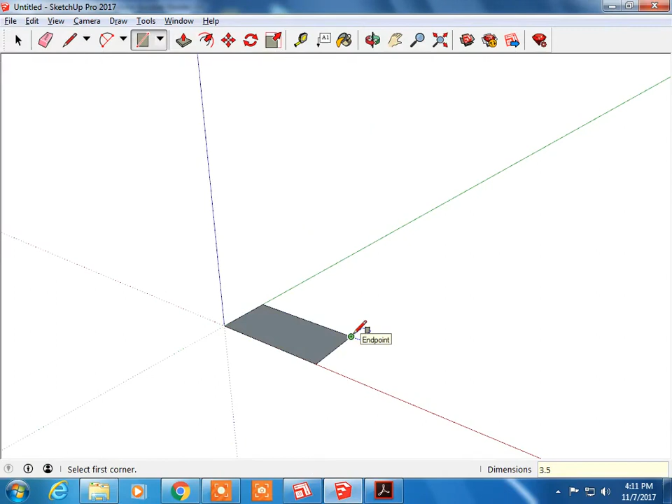So getting back to the modeler, I'm going to select this, pick up my rectangle tool, and describe a rectangle that's 3.5 inches long by 2 inches wide.

So you see it's pretty small, I'm going to zoom in on it. I'm going to check the height of the object. The height here is 3 halves, which is 1.5 inches. So I'm going to take push-pull, and pull this up 1.5.

Now, getting back there, there's a few more details I need to do. I need to cut this U-shaped channel out, and I'm going to subtract it away. So we've got 3/4 inch flat on this side, a 1/2 inch flat on that side, and it's 3/4 of an inch in depth. So back to the modeler.

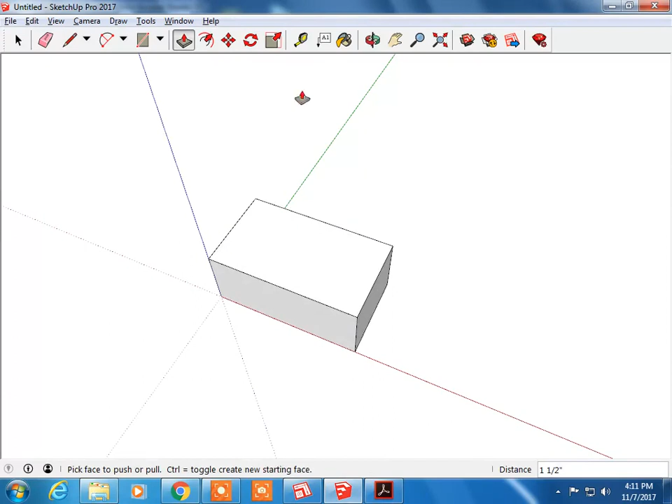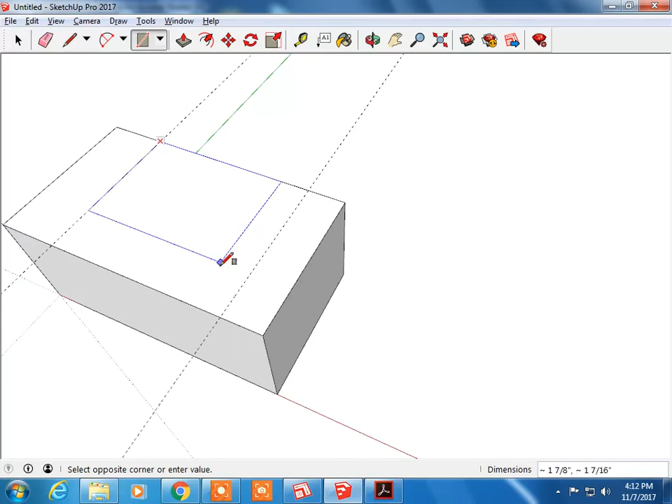I'm going to take my guideline tool, 0.75, and I'm going to go this way 1/2. I'm going to redo that guideline. Okay, rectangle tool. I'm going to describe a rectangle where the guidelines are, and pull this down 0.75, or 3/4.

Now, next step, taking a look at the cutout here. I can see this cutout is 1.5 inches long by 3/4 of an inch deep. So I'm going to take a guideline tool, measure over 1.5, draw a line in this position right here, and then push-pull back 0.75.

Okay, last set of details we have to do is the holes. I take a look back on my drawing. The holes are a 1/2 inch back, a 1/4 inch here, a 1/4 inch to the hole center, same way over here. So my center hole, which is what I'm going to describe, is a 1/2 by 1/2.

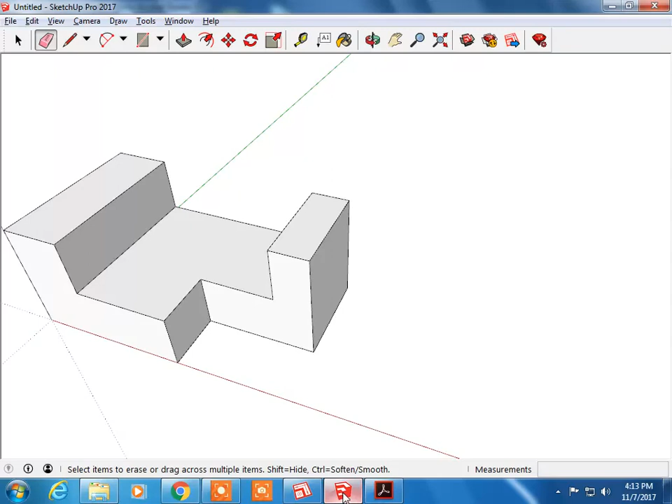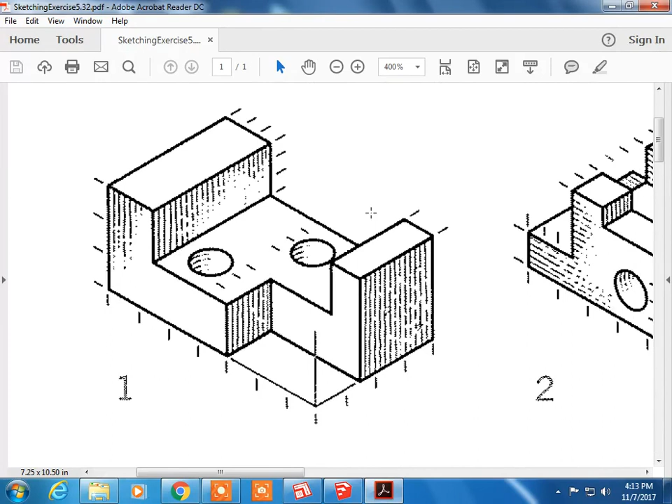So back to the modeler, take my tape measure tool, back a 1/2 inch, this way a 1/2 inch. Looking at the other hole, I need it to be centered on this cutout and a 1/4 inch from the back edge. So I'm going to line it up with this edge right here, and describe another guideline, a 1/2 inch back from the back to front.

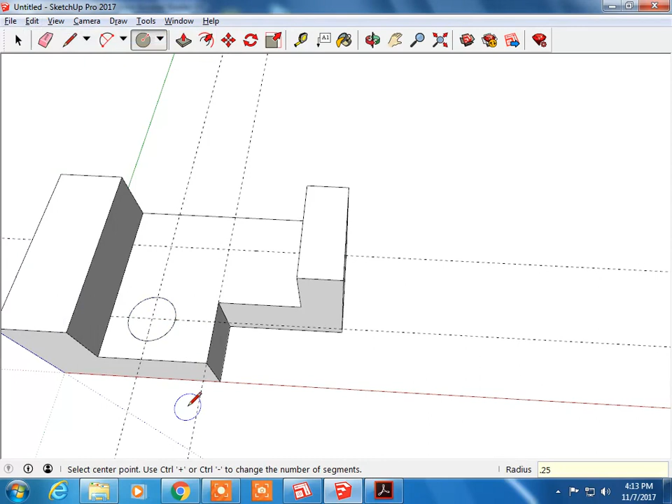Now I'm going to switch over, get my circle tool, and draw the circle in the right spot. It's here in the front for the frontmost, and the radius on that is 0.25, and the radius on the second one is 0.25. Once I get those set, I'm going to erase these guidelines, and then use push-pull to push this underneath right on the face, and do the same to this side.

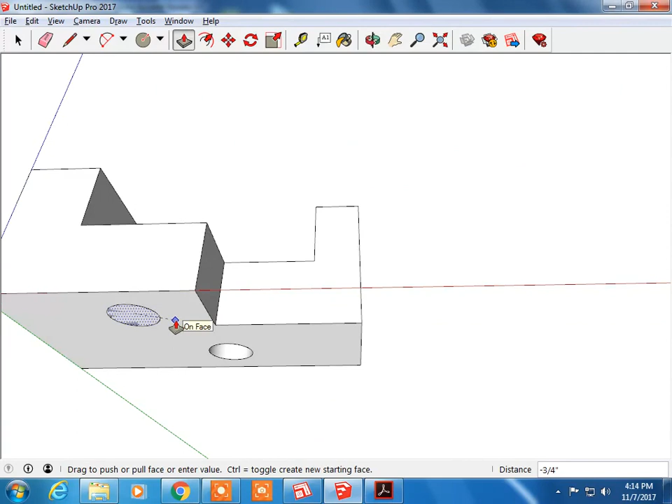Alright, just to finish up here, I'm going to need to do view back edges and view hidden geometry, and then I just need to save.